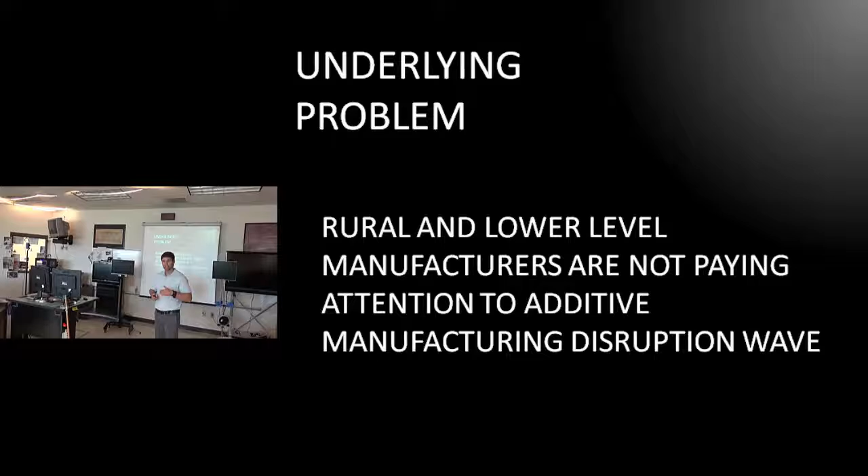With that, we want to make sure that's not the case. We don't want them to be left behind, so what we were proposing is: perhaps you don't want to go into metal right now, but you should at least be aware of the technology and its potential within what you do currently. Your current business model can have additive manufacturing integration at low cost. We want them to be prepared, but we understand they're not going to invest large amounts of money in large metal printing systems. They might be able to afford some low-cost options.

So we need to give them a carrot. We need to put something out there for these companies to see and realize there is money to be made or money to be saved with their current operations. That money is representative of low-cost additive manufacturing. By saving large amounts of money with a low-cost machine, it can get additive integration into the door, into the company, get them used to the process, get them seeing the potential, learning how to optimize, and then as that larger disruptive wave comes along, or new contracts open up that can only be done with additive, these companies will be ready to take that step.

We don't want them to be left behind. We know they can't get in right now. We want them to be thinking about getting in as soon as possible.

So our primary objective is to demonstrate that FDM, or the typical fused deposition modeling, also referred to as FFF, fused filament fabrication — essentially low-cost FDM machines — can be used to generate significant savings and provide serious convenience within companies that already have an existing operation. Maybe it's on the machine tool side, maybe maintenance, maybe marketing, who knows. But we want to show that low-cost equipment, desktop 3D printers, can be added to your current company and used for more than just prototyping. They can be used to actually make things to make your business better, make your machines work better, optimize your current process with a very low risk factor. You can get in the door easily, low entry, get started making things, produce savings, justify the cost of the equipment, and then go on beyond that.

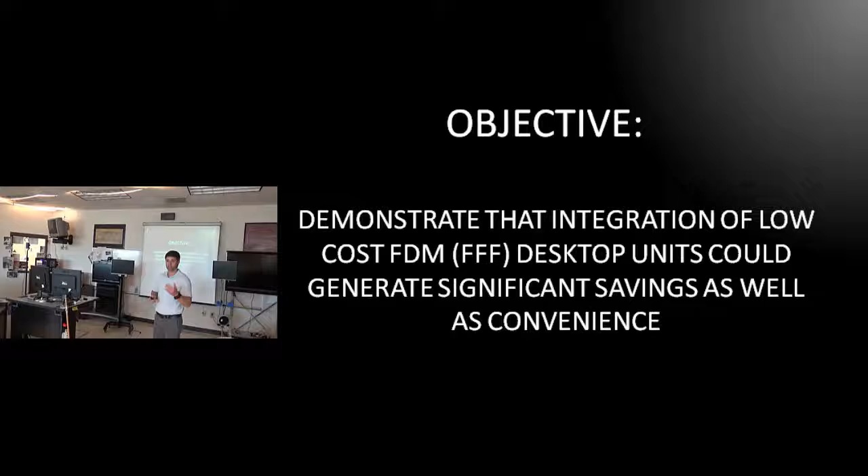So whatever our carrot is, that's our objective, and our basic research looked at what low-cost FDM is. This is the type of equipment we're talking about — systems that are fairly straightforward.

You know, equipment that you can see right there, that's a Lulzbot Taz. We have a Prusa right there, an Ultimaker in those cases. Low-cost equipment, and we're probably talking less than $3,000, $2,500, in some cases $800, that can be bought, installed in a company, and start producing parts with hardly any entry barrier whatsoever.

So the real question was, who do we start with? What companies do we engage and say, okay, here's the opportunity, this is a machine you want to try out, where do we go? So do we start off with aerospace? We actually have aerospace contractors in our region making parts for the aerospace industry. We have automotive. We have a very strong automotive manufacturing industry in our region. And so maybe that should be the group we should help to integrate.

We should connect with their maintenance departments and show them, hey, there's applications that you can do right now that you've been missing out on. There's optimizations waiting to happen.

Or maybe we should look at heavy equipment. Companies like Caterpillar, they're not too far from our service region. And they have large industrial equipment industries. They make a lot of big, heavy parts. So if we do some FDM with them, they can see that there's applications for the metal side very easily. So all these are possibilities. We're trying to think which one do we want to go with.

And so obviously, the obvious choice was baking cookies. So we decided that baking cookies was the way to go. We should use FDM in the manufacturing of baked goods.

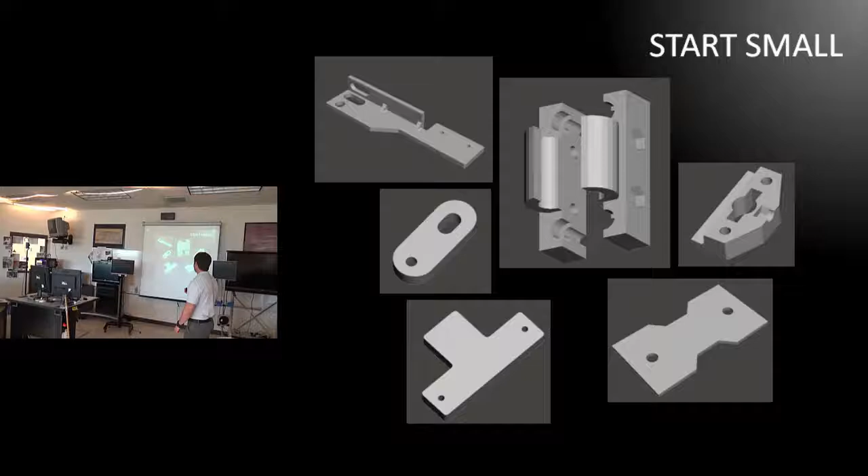So here's a couple of examples of the parts that you see here. We have a couple brackets that were two-parters. There's the long one that you see, very, very small ones here or there, all that kind of thing. Nothing really special. You even notice the geometry itself is actually very, very simple. So keeping that in mind, we're good to go with the design.

And so we set off to doing the process. Now typically all of the designs that you saw here are actually just good old-fashioned CAD models. They were actually done with a very simple, easy-to-use CAD package, and they were actually provided to us by Hearthside.

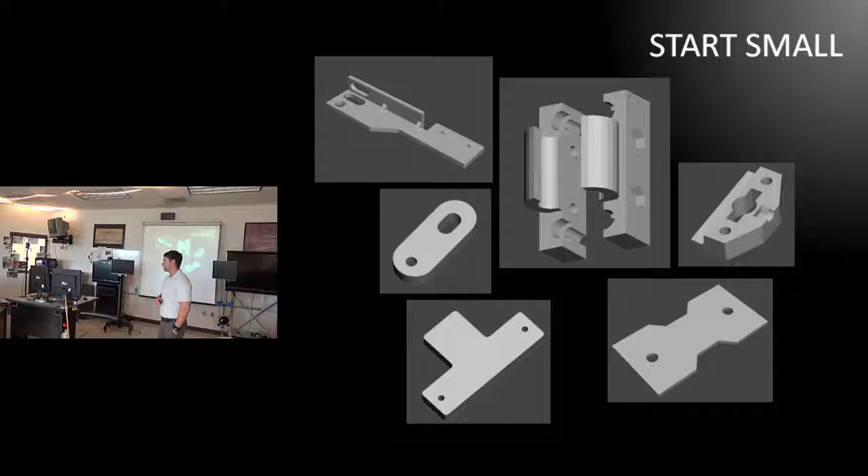They provided the models with a little CAD work, and we did the printing. We used a couple different machines for most of these. In the model on the upper left is one of the brackets, the Dorner bracket, and you'll notice we batch printed that. We didn't just print one at a time, we did a total of six. Then we have a couple other brackets down there at the bottom, and there's an example of one of the machines we use.

This is the Prusa i3 Mark II unit. That particular unit is of great interest to us because it only costs about $800 shipped to your location. Now that comes in kit form, but you can pay a couple hundred dollars and they'll assemble it and still ship it. So about $800 to $1,000 either gets you a kit version or a fully assembled, ready-to-go unit. We like this printer, this system works well. It has good detail, good controls. Just super pleased with this unit.

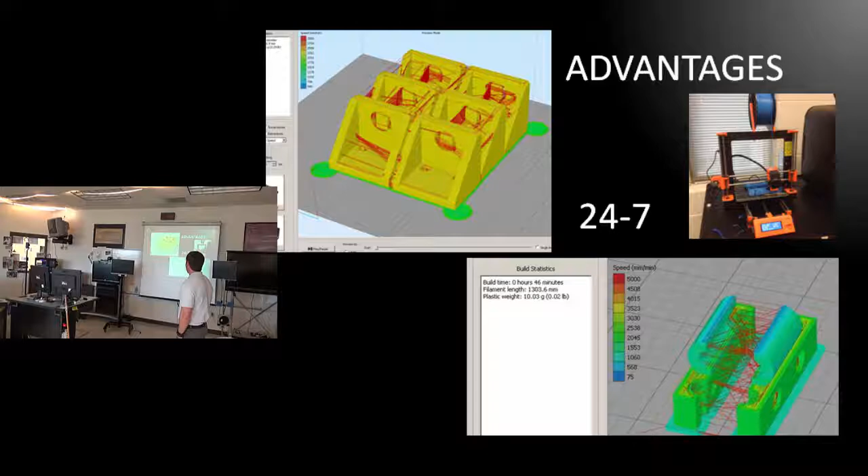We printed quite a few of the parts on this particular printer. One of the best features about this whole process is that number right there in the middle, the 24/7. These printers can run 24 hours, 7 days a week, if you want them to. We'll talk a little bit more about that later on.

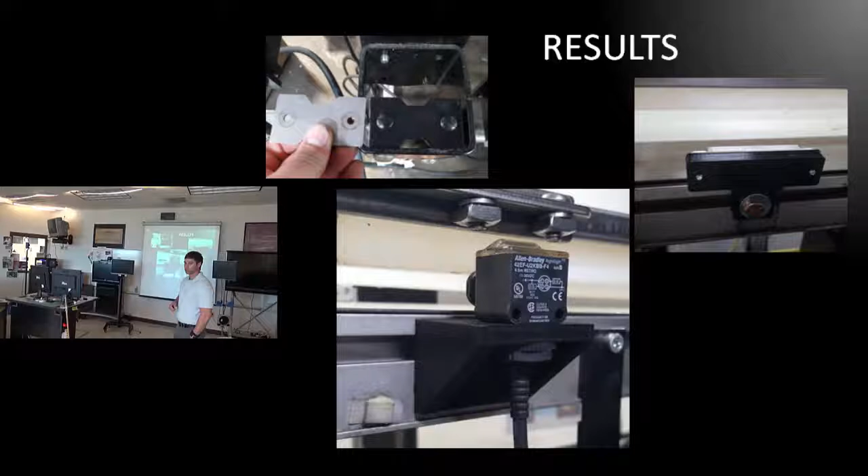We started off by printing those parts, and it turned out pretty straightforward. Really didn't have a lot of problems. We knew the settings, we knew what to do, and those parts were pretty easy to fabricate.

As you can see, these are some of the parts in actual use at Hearthside. One of them is just sitting there holding a clicker, or a camera bracket. I think it's a sensor or something of that nature, you see those kind of things. There's also just a cap plate, and I think that has another little sensor on it, I'm not real sure. We didn't really know what the parts did. All we knew is they said, we need these parts, make them for us.

It's not a big deal. We load the files up, we do a little slicing, and we let the printers take over from there. These parts are pretty basic. Now these parts aren't optimized for additive manufacturing, that's a whole other topic of conversation, but they're pretty easy to produce.

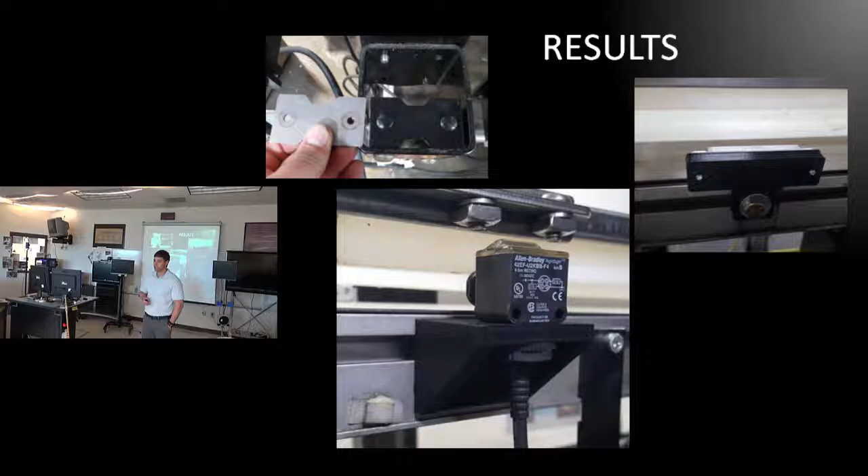We actually did this project over roughly 60 days or so of different files being sent back and forth, those sort of things. So these were just trial runs. But it normally cost them roughly $815 to actually get these parts made or purchased when they ordered.

Then we did the FDM. Here's what you need to know: that same number of parts that normally cost them $815 cost us about $27. So to produce the parts that they were paying $815 for cost us about $27 just to print them.

Now keep in mind, the concept here is not that you're hiring a new person to do this technology. The concept is you have an existing person in the company—we'll talk about this a little bit more—but you just buy a printer and you start printing the parts that you need. That's why we're not factoring in shipping costs to ship them from one site to the next, because it's assumed that one day the printer will be in their location. So we didn't worry about that issue.

By the way, that $815 you see didn't include some of the shipping costs, so it's actually likely higher. But anyway, bottom dollar, $788 to $789 of savings represented in just that first few batches of parts. Literally, in the first few runs of testing this out, they saved enough money to pay for the machine. They could have bought the machine we printed the majority of those parts on with the savings. Just over a few months of trying it out, just seeing what they could do, they could have already bought the machine and paid for itself.

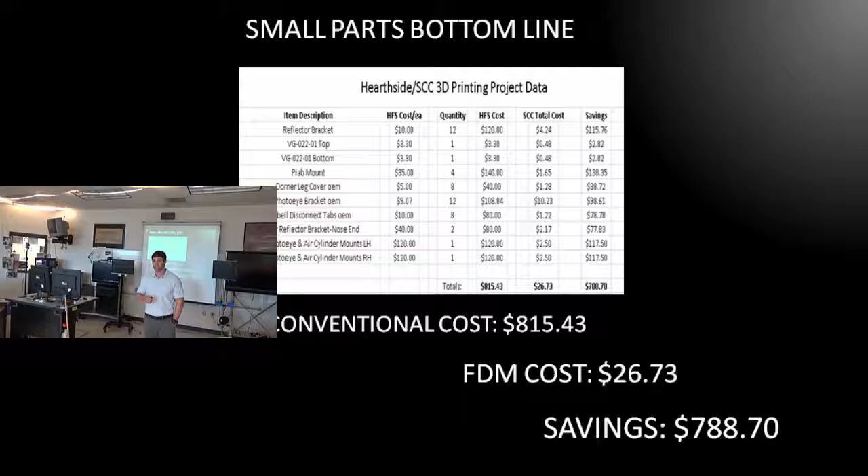So that's a big deal, and so we consider it a success. We're like, well, this works. This is an optimization consideration because not only can they now make their own parts, but they can also optimize, come up with new designs, and just keep rolling like gangbusters in their creations.

So we decided, let's go bigger. Let's do something bigger and better. Let's do something that folks would really appreciate. Let's do something that just gets attention, and therefore we came up with the funnel project.

Here's one of the prototypes right here. So this is still Hearthside, of course, and you can kind of see some of the stuff at your tables and stations there of different parts and different pieces that we worked with. But this is the funnel that they needed replaced. Let me explain what this funnel does.

You see the funnel. The funnel is actually in the middle of a metal detector. So to make sure that you're not getting any metal shavings into your cookies when you're eating them, they have a metal detector to sense that, and it will shut down the system if it detects any metal. But obviously in that case, you're probably not going to be making your actual funnel out of sheet metal, right?

So they have these nylon large funnels of this size. The chute drops the baked goods down the funnel, the detector is surrounding it, it sees if it detects anything, and then they drop them into the bag out of the funnel. Pretty simple, pretty straightforward, and obviously they have to have one of these funnels to facilitate this.

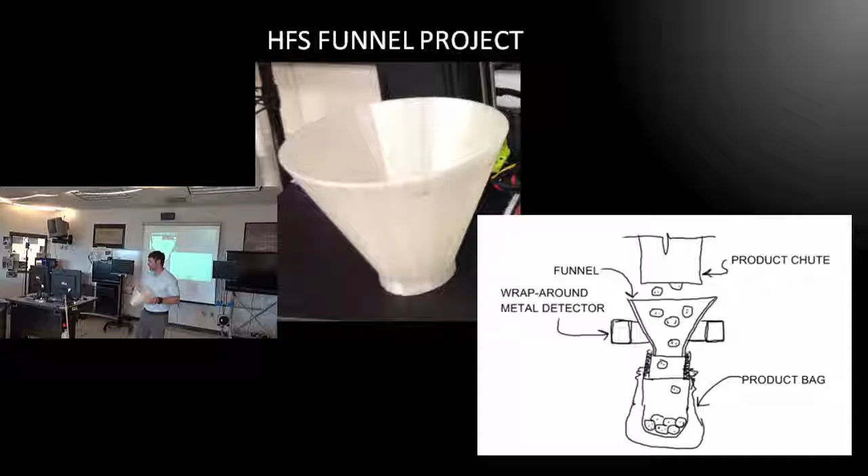Now they have about 16 of these machines, so keep that in mind. The cost of one of these funnels to be manufactured conventionally, the way they've always bought these things, is about $800 plus shipping these funnels to their factory to actually produce this.

They have 16 machines, and they told me essentially that every time they place an order for these things, the price goes up another $75. So it's not even static. And to be fair, I can understand why, because it's not like they're molding these funnels. They're actually fabricating these funnels in pieces and doing some polymer welding to put the pieces together. You can see the seams.

So keep that in mind. Somebody's having to put a lot of time and effort and material into making this thing, and obviously they're getting paid for it, $800. And there's nothing really special about the design. It's just a funnel.

So they currently only order about 6 of these units a year due to budget constraints. They're incredibly expensive, and when something breaks, you've got to take it out of somebody's budget. They have an issue with that because when one of these machines goes down, they may not just be ready to throw another $800 at a new part.

So what they typically do is get about 6 new ones a year, and they just keep doing repairs. If one breaks or wears out, their maintenance guys do some fabrication work and put it back into service. Not their best work if they can repair it, and obviously it's going to fail again soon. That's a manual expense they have to spend, but it's still cheaper than spending another $800 to get it done.

Now, that limitation of 6 is because they can't afford more, they just don't want to budget for that much. But they said that if they could have 24, they could actually improve their overall process. Now that's kind of out there — that's just way too much expense for their maintenance budget, so it's not really even an option for them. But if they did have 24 a year, they could actually streamline the process. One goes down, they don't have to hold it for long to do repair work.

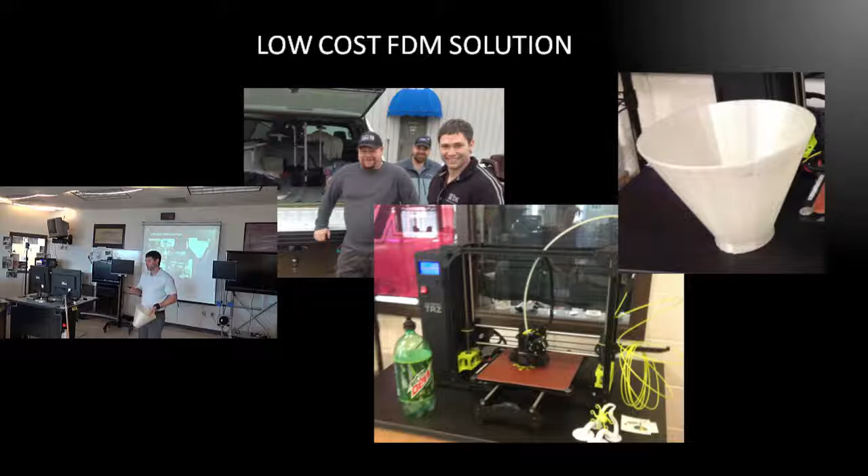So it shows up, and we get started with the process, because we know we can't just use any material for this. We need to use a specific material that's FDA approved. The material they're using right now is nylon, so we should probably start there. So we do some tests, some trial runs - you can see some of the setups we've done, some of the parts there.

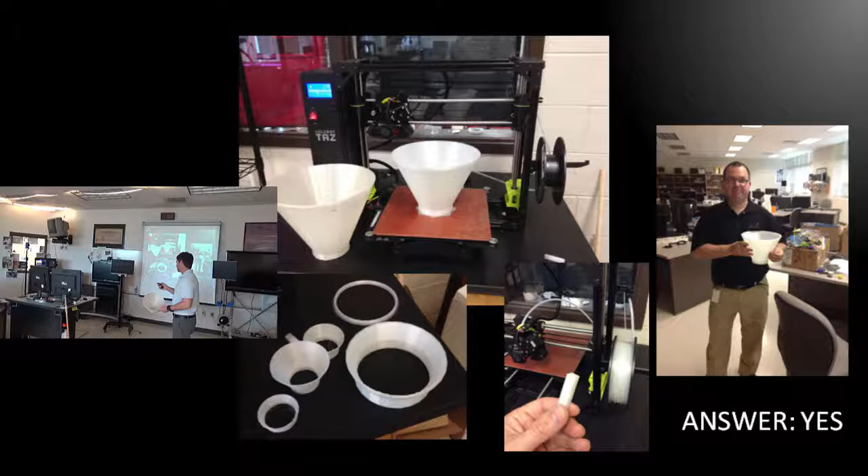Small little funnels, medium-sized funnels, funnels all over the place. We simply ordered some nylon off a typical website. Nylon 618 was our first run - we got an order of about half a kilogram, ran it, got the settings dialed in. Then we switched over to doing nylon 680, which is actually FDA approved material, and printed that. And the answer: yes, yes we can.

So there's our Hearthside representative, Mr. Charlie there, who's about to take the first version of it back for testing, and pretty happy with the process. Essentially we just printed something that had to be manually made previously, and it's going to solve their problem using a unit we can buy off the internet for $2,500, one that can actually run 24/7.

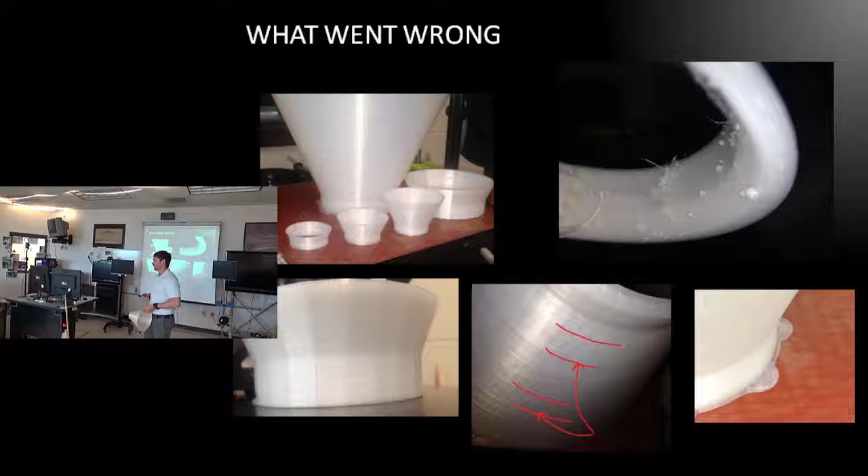Now, keeping in mind, we didn't get there right off the bat - we had to go through a lot of trial and error. One of the great things about these printers is that 24/7 operational profile, because to fabricate one of these, that TAZ has to run for around 40 to 50 hours, depending on settings. That's a long time, but the great thing is you don't have to watch it - you can just turn it on and walk away. A few little settings, we'll talk about that later on, and what you can do to make that happen. That's a serious factor in the oversight of this whole concept - these machines can just run and run with little to no supervision.

So different sizes, different things happened to us. First of all, when we started off, we were getting that funny curvature you see on the bottom left there. So we did have a problem with the original CAD model of the funnel - again, this came from Hearthside, that their software didn't produce a nice smooth round. We thought it was the slicing settings on the printer side, but it actually wasn't - it was actually the model. So all we had to do to fix that was go in and fix the computer model, the CAD model, and then reslice it, and it was fine. So that took care of that problem.

And of course, getting the settings dialed in to produce the parts in the right size and the nylon temperature settings was actually a lot easier than we thought it was going to be - pretty straightforward.

We did have a little funny effect that we associate with nylon and its response to moisture. We get these little bubbles on the inside of the funnel, not on the outside, and we think we can take care of that through settings. We had already planned on the funnel having a little post-finishing work anyway, a little smoothing out, and these things just prick right off, so it's not a big deal, but it's something we're going to work on figuring out. But little bubbles was an issue.

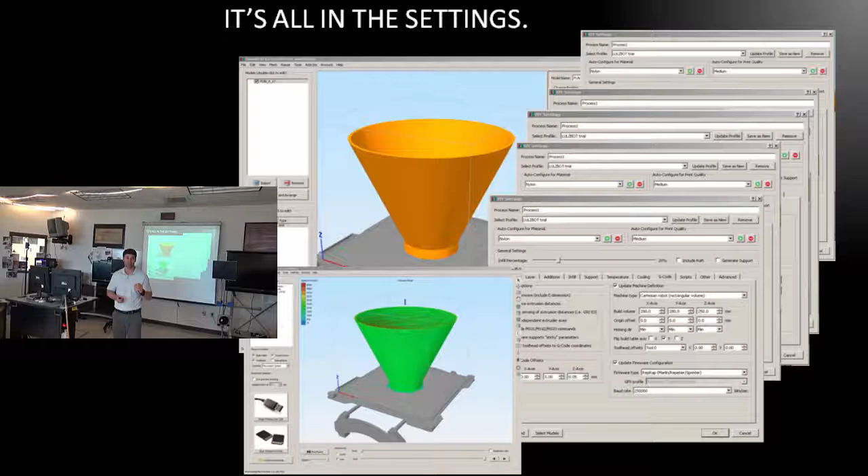What you see here is the software we use to do the slicing. It's called Simplify 3D. It's a sort of universal software that controls 3D printers of all different types and features. It works really well and gives us a ton of options and controls — I think there's over 100 different setting choices we can make with this software. It gives us ultimate control over the performance of the machine, and can typically take a decent machine and turn it into a great machine just because of the slicing.

You can see all the little stacked tabs and windows here — those are different setting tabs we can adjust to get our features right. The top view is the placement of the model. The bottom view, in green, is the simulation mode, where it shows us how it's going to print the object, shows us the layers, shows us any errors that might be happening in the model that we don't realize, all kinds of things. We love that simulation mode. It also gives us the prediction of time and material consumed.

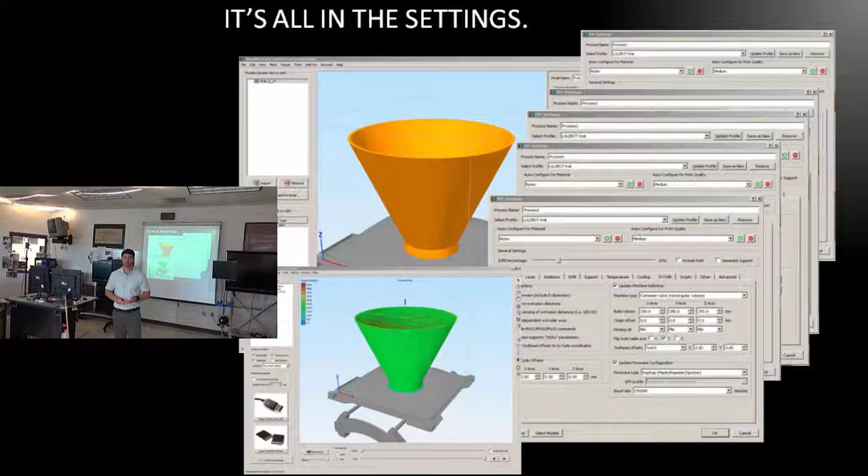So, to get to the bottom line, here's what you need to know, here's what you're probably most interested in: to actually purchase the equipment is $2,500, shipped right to your site. It's great.

The FDA approved nylon 680 roughly costs around $30 to $40 for a half kilogram, depending on who you're buying it from, but that's not a big deal. What you're most concerned with, though, is right here.

Keep in mind, this thing used to be conventionally manufactured for $800. We estimate that even considering maintenance, wear of the equipment, and actual energy consumed, you're topping out at maybe $48 per funnel. Less than $50 to make an $800 part. And it's made with the majority of time spent overnight, off-shift work, by a machine that costs $2,500.

As an extra bonus, we did some checks on our model versus dimensional accuracy on the actual part. We had basically a plus or minus tolerance of 0.22 millimeters, or 8.7 thousandths of an inch. Pretty good for a $2,500 machine that sits on your desktop. Could be at your house, really.

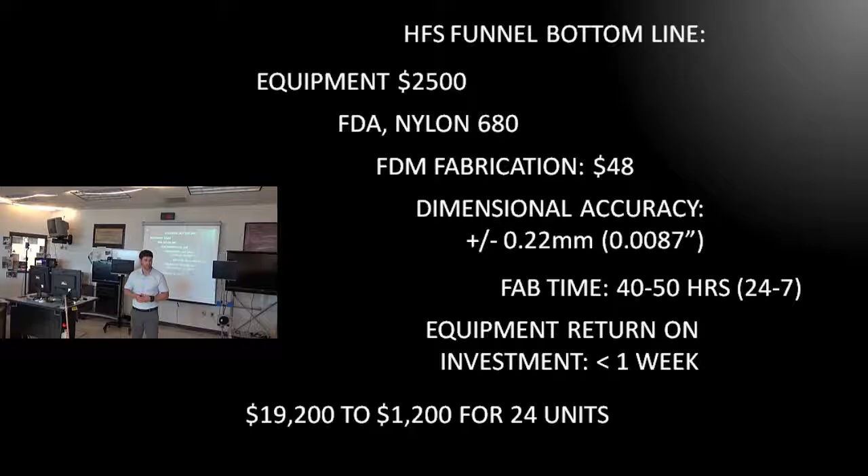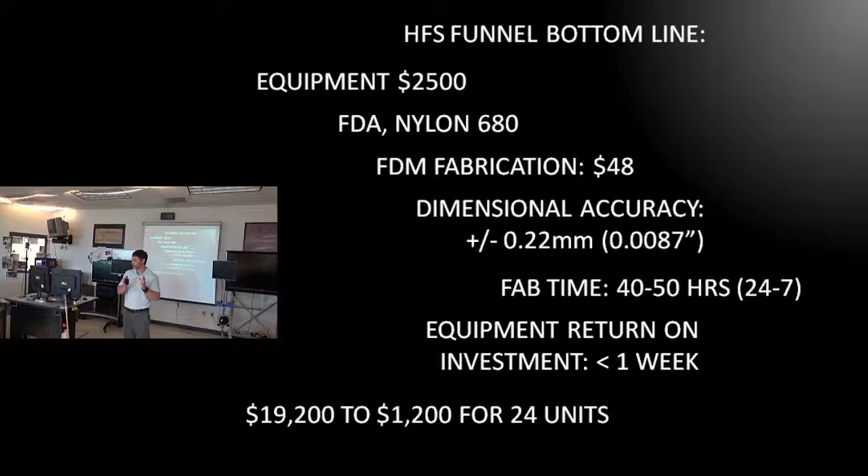What's not worth trying, to see what you can do to integrate and optimize your process? It's hard to argue with numbers like that, which was really exciting for us because we were looking for some silver bullets. We were looking for some examples to say, hey, here are some clear numbers. Here's the biggest carrot you need — money waiting to be saved with a little bit of additive manufacturing integration.

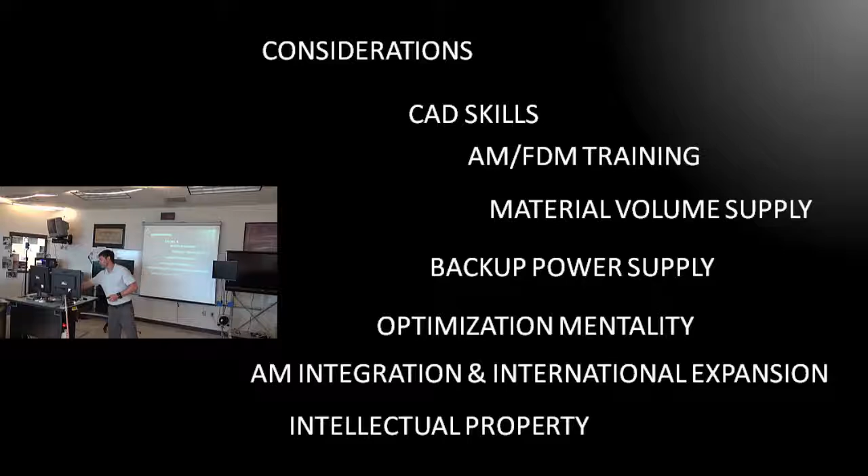Now, considerations associated with what we did and kind of how this works. One of the key things you have to understand is you can't really do this unless you have someone with some CAD skills. The fact of the matter is, someone has to do computer modeling, especially if you want to look at optimization.

One of the things with Hearthside: this funnel is actually a generic funnel. It has 16 machines, but they don't really need this shape for all 16 machines. The shape could be changed, and they've even pointed that out, but they just go with the shape that's sort of universal.

There are even optimizations possible with a funnel that's not as wide or tall, sloped differently, to slow goods down or speed them up. So someone within the operation needs some CAD skills, not necessarily advanced. We foresee about 30 hours of training covering both the CAD and slicing applications, even less if they already have some CAD skills. Most manufacturers have internal connections to people with CAD capabilities, so we don't see that as a real entry problem.

Now, the FDM additive manufacturing training obviously has to be there for this to work, and it can be packaged up fairly easily. We're probably talking about a week of training or less to get the machine going, then getting the hang of actual production. The little nuances get learned on the job, but you could train someone fairly fast with the right programs and certificates.

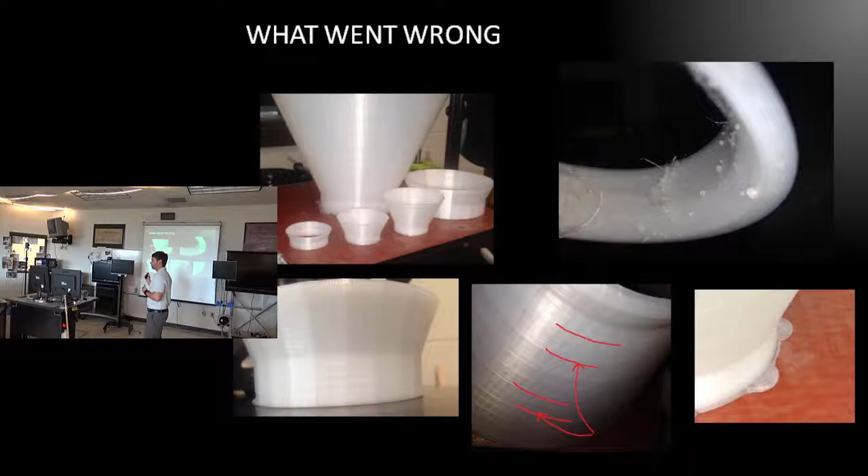When you have the ability to do that, that means any company can get into a whole new market. They don't have to go through so much machine time and expense to get parts made for whatever their product is. They can start making a product and use printers to make the production line to get them started. It just reduces so many barriers that makes the technology totally unlimited.

Now what you're going to see is the enterprise level integration of additive to produce parts that you could not make any other way. Here's why: if I can actually design a part without having to concern myself with whether somebody can make it, because I assume additive can, and for the most part it can, I can design for the exact perfect solution to my problem. I don't have to live close to reality, I can actually live in the theoretical in some ways. I can make a fluid line do weird and crazy curves to hit where I need to get, create different shapes for different velocities and circulations within hydraulic systems. I can redesign everything to solve the problem perfectly, not just get as close as I can within conventional manufacturing means.